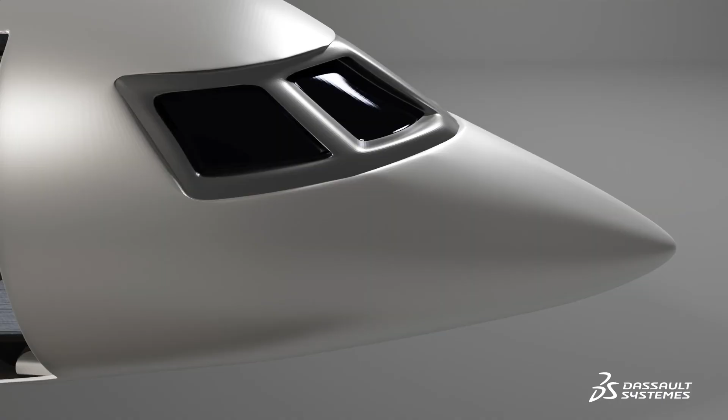UUDS AERO is a design and certification company, and we manufacture a range of aircraft cabin equipment.

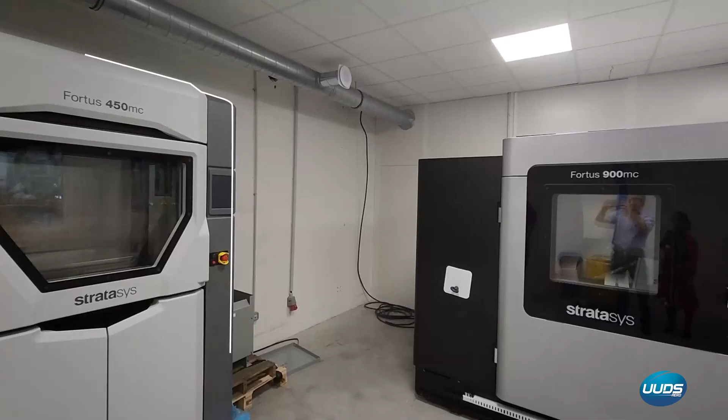One of the biggest challenges was managing the entire value chain from design to realization, manufacturing, and the delivery of certified airworthy equipment, encompassing both data management and industrial mastery in order to maximize quality, lead times, and costs.

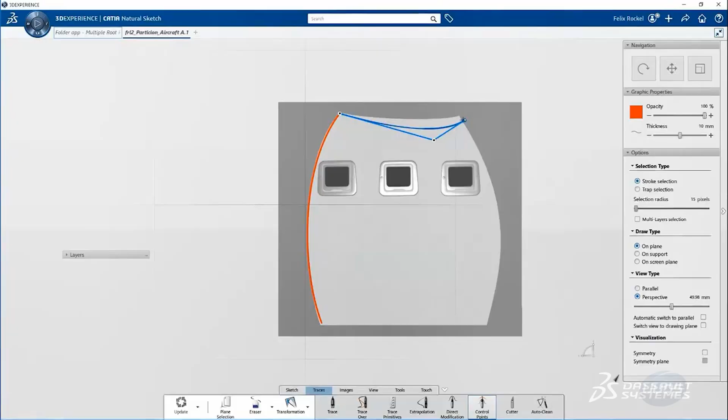We chose the 3D Experience platform to validate the design and certification steps of our products. We consulted MBA Innovation, which is supporting us with excellent project management methodology and expertise on the platform.

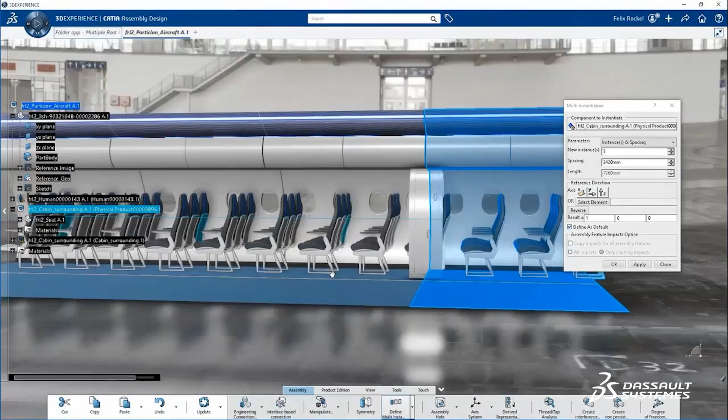And we use the cloud because it gives us easy access to information wherever we are, with cybersecurity tools and intellectual property protection by Dassault Systèmes.

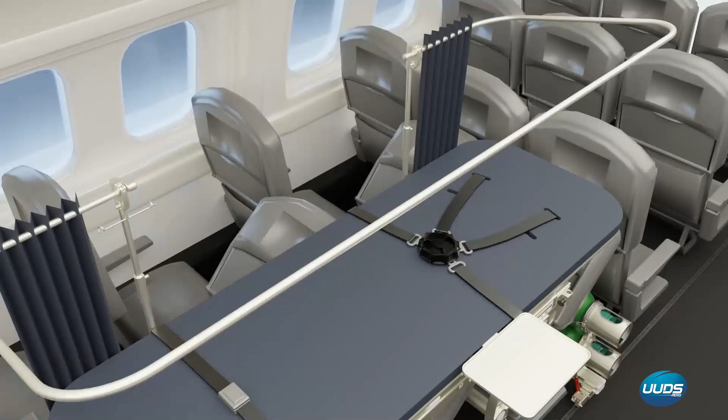The solution allows us to share information and communicate with our clients and our supply chain. The platform supports our development in terms of structuring our cabin furniture business and innovation to improve our operational performance.

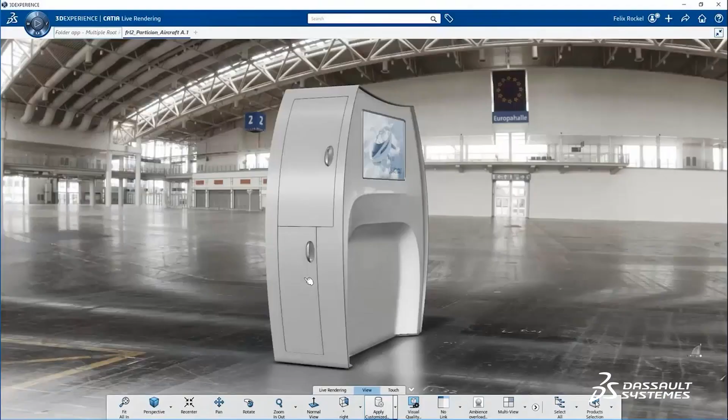I would say that it's really continuous improvement because we are interested in artificial intelligence, which is beginning to integrate into the platform, such as the ability to automate a number of data transfers from design to manufacturing.

And it's my wish to launch new projects to expand the use of the platform and its functionalities.